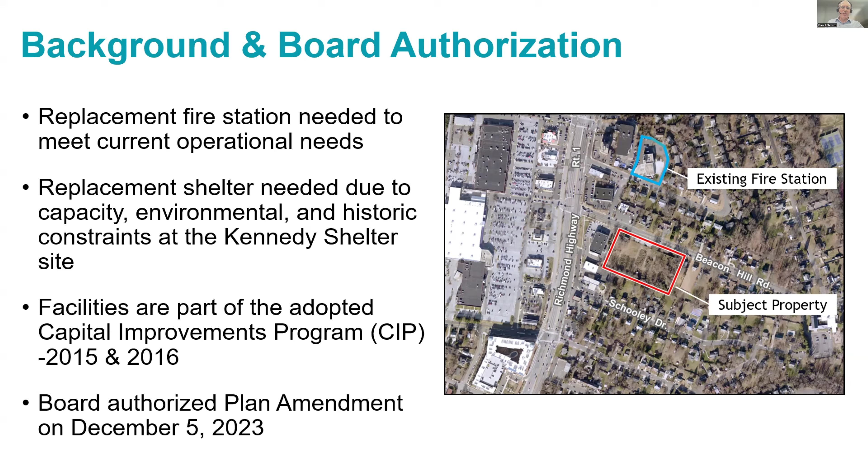Next, we'll review the location of the subject property. The site is located along the south side of Beacon Hill Road on the former site of the Hybla Valley Nursery property, highlighted in red on the map. A portion of the subject property lies within the Beacon Groveton Community Business Center, which guides redevelopment along the Richmond Highway corridor. This site is also within walking distance of a planned Richmond Highway bus rapid transit station, shown as a red star on the map, which was one of the factors considered in evaluating the location of this proposed public facility.

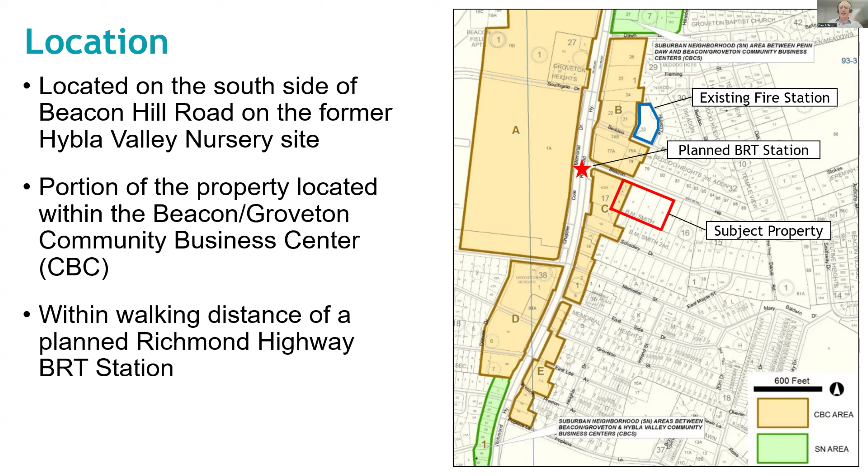Next, I'll review the current comprehensive plan recommendations for the subject property. The subject property is located in Area 4 of the Mount Vernon Planning District, specifically the MV5 Groveton Community Planning Sector. A portion of the site is located within the Beacon Groveton Community Business Center, or CBC, and within the CBC, the adopted plan recommends non-residential uses with building heights up to 50 feet. The portion of the property outside of the CBC is planned for residential use at 2 to 3 dwelling units per acre. So the subject property spans 2 planning designations.

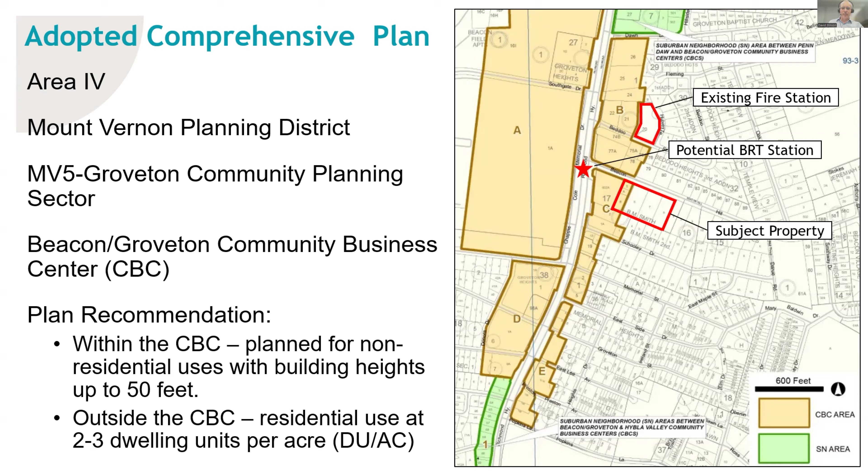This slide shows the existing conditions on site. The subject property is approximately 3.5 acres, and as previously stated, it was formerly used as the Hybla Valley Nursery. The site is currently vacant and contains a former nursery office building, which was originally constructed as a residence and later converted to commercial use. There's no active use on the property today.

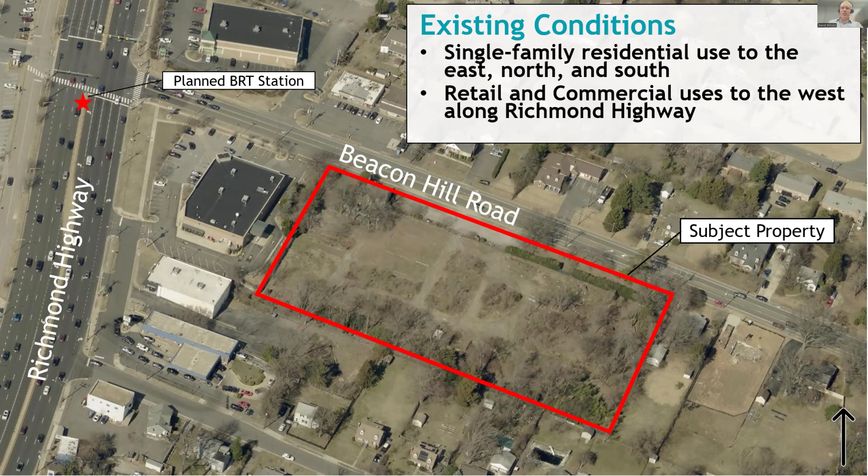This slide shows the surrounding land uses. To the east, north, and south are established single-family residential neighborhoods. To the west, along Richmond Highway, the area transitions to retail and commercial uses. So the site sits at the edge of the Beacon Groveton Community Business Center and functions as a transition between the Richmond Highway corridor and the adjacent residential neighborhoods.

This plan amendment would establish an option for a public facility use on the site at an intensity of up to 0.6 FAR. The option would allow for the co-location of an emergency and supportive housing facility and a replacement facility for the Penn Daw fire station.

The proposed emergency and supportive housing facility would include a 3-story, 55,000 square foot building. As stated previously, this building would include 50 emergency shelter beds, 20 individual supportive housing units, and 10 family supportive housing units. The replacement facility for the Penn Daw fire station would include a 2-story, approximately 24,000 square foot facility, designed to meet modern operational needs of the fire and rescue department.

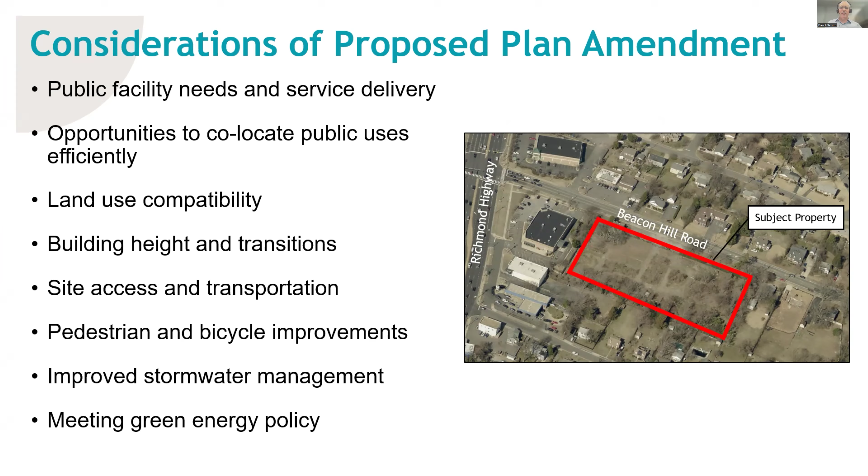The next several slides walk through the key considerations staff evaluated as part of this plan amendment. These included compatibility with surrounding neighborhoods, building heights and transitions, access and transportation, pedestrian improvements, public facility needs, and stormwater and sustainability measures. We'll start with the public facility considerations.

Both the fire station and the emergency shelter are aging facilities that no longer meet operational needs. The existing Penn Daw fire station was built in 1967 and cannot accommodate today's staffing levels or modern equipment. Similarly, the Eleanor Kennedy Shelter is undersized.

It's located in a historic structure on leased land and cannot be expanded due to environmental and historic preservation constraints. Co-locating these two facilities allows for efficient use of county-owned land, shared infrastructure, and improved access to transit and services along Richmond Highway. This approach aligns with the county's policy plan guidance, encouraging efficient use of public land and the co-location of compatible human services and public safety facilities.

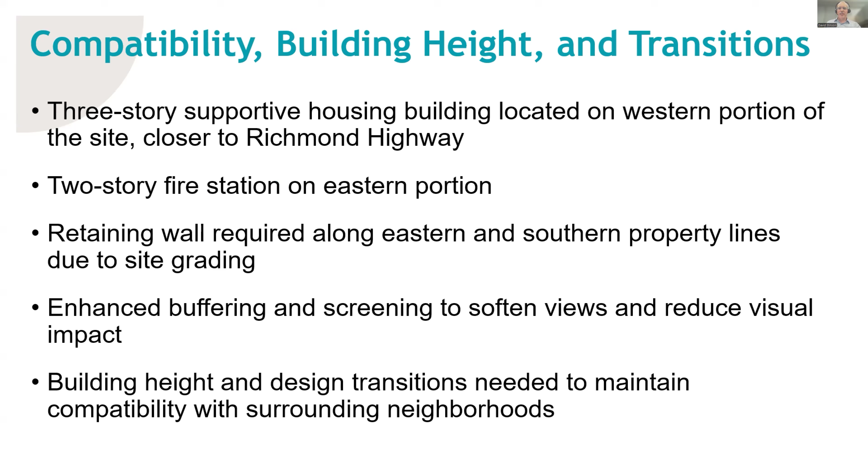In terms of compatibility, the 3-story supportive housing building is located towards the western portion of the site, closer to Richmond Highway, where higher intensity uses are already planned. The fire station, which is 2 stories, is located on the eastern portion of the property. Due to site grading, a retaining wall is required along the portions of the eastern and southern property lines. The project includes enhanced landscaping and buffering to soften views from adjacent homes. Overall, building placement and height transitions are intended to maintain compatibility with the surrounding neighborhood.

Now we will move on to transportation considerations. The proposed public facility uses are expected to generate relatively low levels of traffic compared to many other types of development. A traffic study was conducted by the Fairfax County Department of Transportation, and the proposed facility will only generate a minimal number of additional trips when compared to the use currently planned for the site by the adopted plan.

Primary access to the site would be from Beacon Hill Road, and internal circulation would be refined through the site design process. The project also includes recommended sidewalk and bicycle improvements along Beacon Hill Road, as well as improved pedestrian connections to the planned Richmond Highway BRT station. There are also opportunities to enhance pedestrian safety at the crossings along the site frontage.

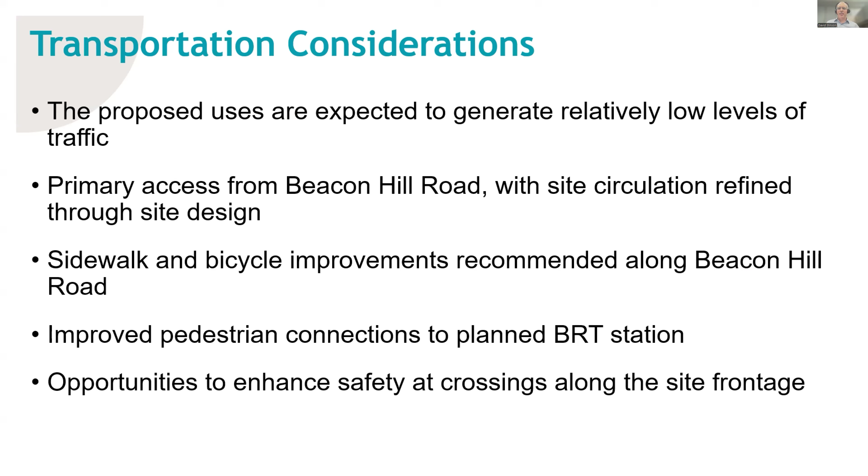From a stormwater management and sustainability standpoint, the project will be required to meet all current county stormwater management requirements. Because this is a redevelopment of an existing site, it provides an opportunity to improve drainage conditions compared to what exists today. The buildings will also incorporate energy efficient systems and EV ready infrastructure consistent with county sustainability goals. The project will also be consistent with the environmental policy plan and subject to the board's sustainable capital project policy.

To summarize, the proposed plan amendment establishes an option for a co-located public facility on the site at an intensity of a 0.6 floor area ratio. This comprehensive plan option would allow a new fire station and an emergency supportive housing facility to be considered through a rezoning process. The plan amendment also includes recommendations to support height transition and buffering where the site abuts single-family homes.

Additionally, the draft plan text recommends pedestrian and bicycle improvements along Beacon Hill Road, particularly to enhance safety and strengthen connections to the planned BRT station. Finally, I want to note that a rezoning application for the proposal was submitted by the Department of Public Works and Environmental Services. The plan amendment we reviewed provides the policy guidance, and the rezoning application would address the specific site design elements, including building placement, access, buffering, and landscaping.

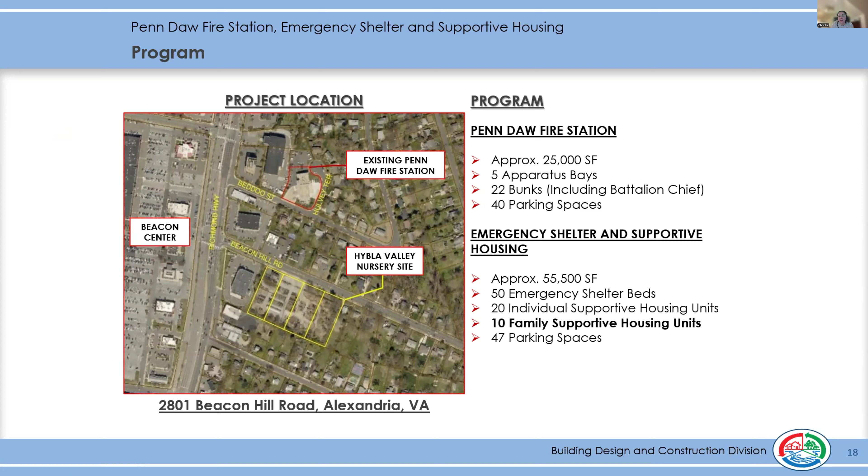Okay, so I'll take it from here. My name is Mark Minetti with BKV Group, the architect leading the design of the overall campus. With me also is Brian Fasala from MTFA, who will be speaking specifically about the emergency shelter and supportive housing. So we'll start with the site plan you see before you.

The last time we met, there hasn't been a whole lot of change from the overall design composition. The fire station continues to be located furthest along Beacon Hill Road, away from Route 1, and the emergency shelter and supportive housing portion is located closer to Route 1, adjacent to the commercial properties, the Walgreens facility. Each of these programs has very unique operational requirements, goals, and relationships.

I'm going to try and touch on those. The site will be entered to serve the emergency shelter and supportive housing components about midway through, at the curb cut along Beacon Hill Road. That will access the rear of the site where the parking is located to support staff and customer parking for the facility. Circulation for vehicles will be limited, in the sense that you will not be able to access the fire station from the supportive housing, and likewise the supportive housing from the fire station site. The topography of the site provides some challenges that we'll go through and explain in this presentation.

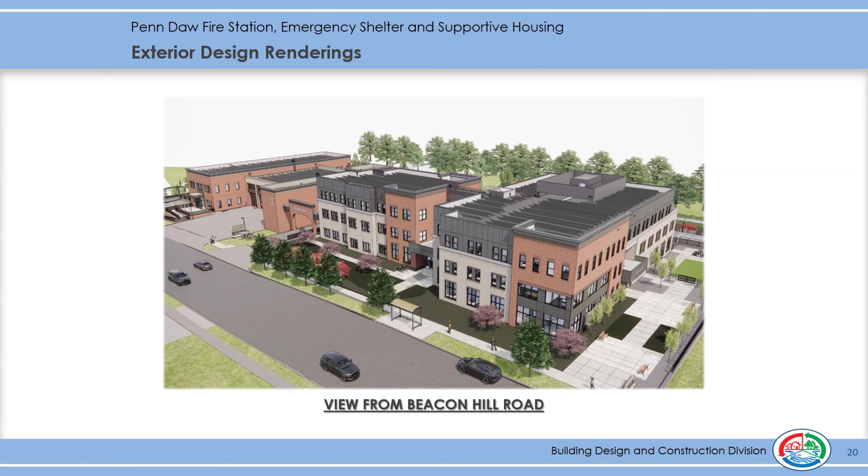This is from the opposite side, again from Beacon Hill Road, but looking up the street, focusing on the fire station. Here you can see the grade is a major challenge even along Beacon Hill Road, making sure that we're able to provide accessible entrances for each of these components.

So you're seeing the accessible ramps that lead you to the main entrance from the streetscape for the firehouse. The 5 bays for the firehouse will be accented by these folding doors.

From a wayfinding perspective, the firehouse will be very clearly identified within this composition, and the public will be able to discern where to enter the building.

Some of the architectural elements we really wanted to focus on: the palette of materials includes masonry. We have a nice red brick that we're using, and we've repeated that red tower element on several occasions because it was important that this campus read as a unified civic campus, not as two separate dissimilar buildings on the same site. So there's language we wanted to maintain and repeat throughout the overall composition.

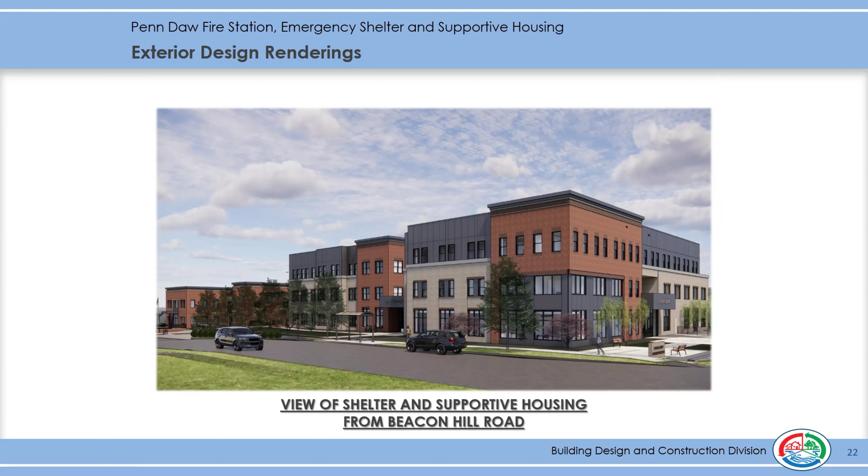Let's go to the next one.

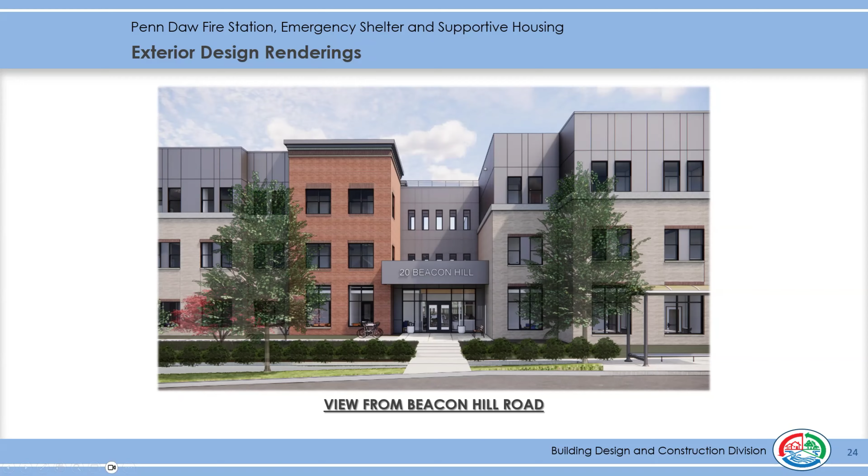And we worked really hard with planning, and our landscape team, to develop a kind of living wall concept here that was going to integrate plantings at multiple levels, and break up that wall so that it wasn't so massive, and really had a sense of biophilia within the overall design composition.

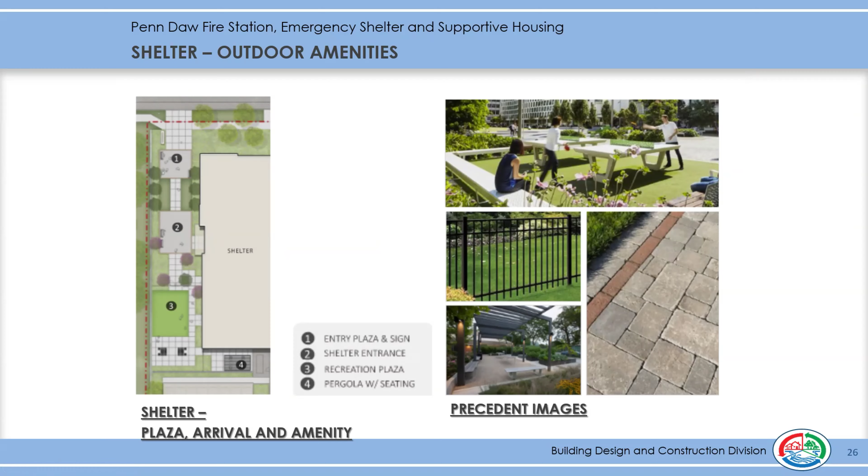Brian, these are more specific to your elements. Did you want to touch on anything specifically? I think you did a good job illustrating them and describing them.

As you mentioned, the main importance is that we really wanted to try to create two separate zones of outdoor amenity space. Outdoor spaces are very important for not only the physical but mental health of the users, but wanted to create separate zones for the shelter, which Mark had shown on the previous slide, and then this area, which is more for the family supportive housing side.

And so those would all be of very high quality materials, but also bring kind of this biophilic nature to the site, and then also carrying that inside to the building too, so that it kind of enhances the mental wellness of the users.

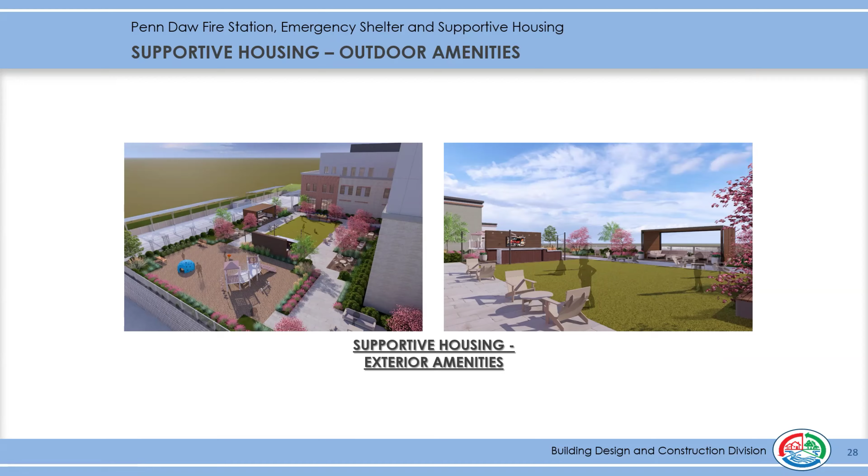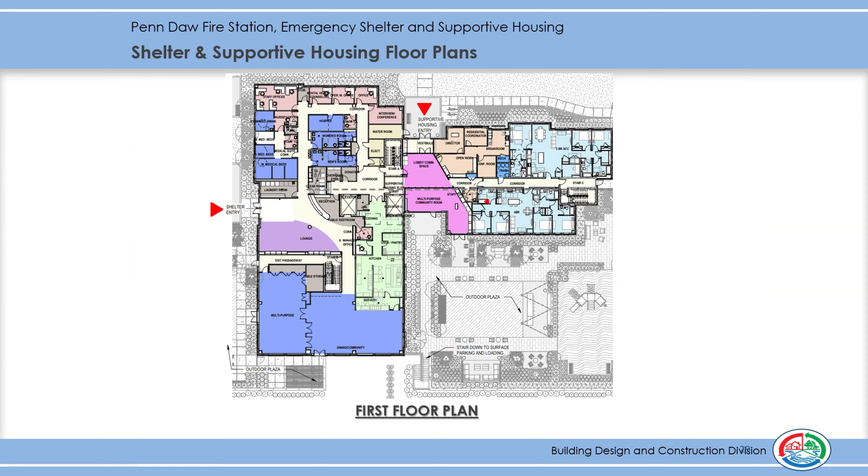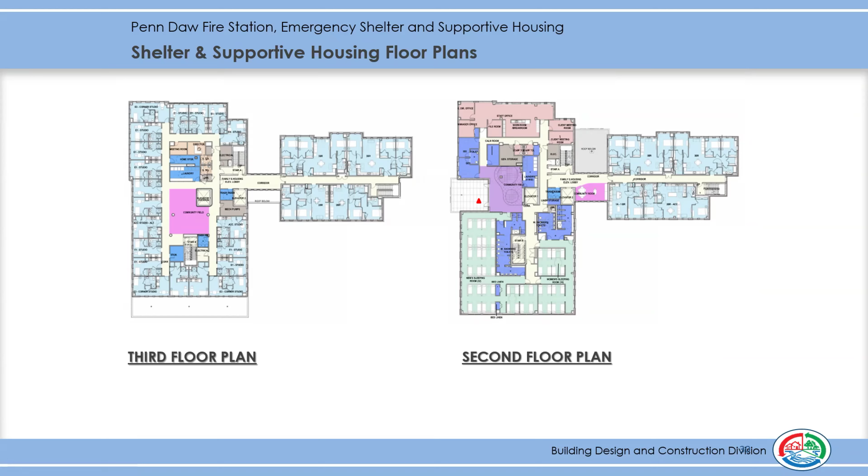With respect to fire stations, there are several best practices and priorities in terms of how we plan these facilities. Cancer prevention is a huge concern within the fire emergency services industry, so we look at segregating the source contaminant areas from what we call the clean zone. We do that through specific airlock corridors that connect the source contaminant spaces to the clean spaces, and we also segregate the systems serving those spaces, like the mechanical system, so they function independently of each other.

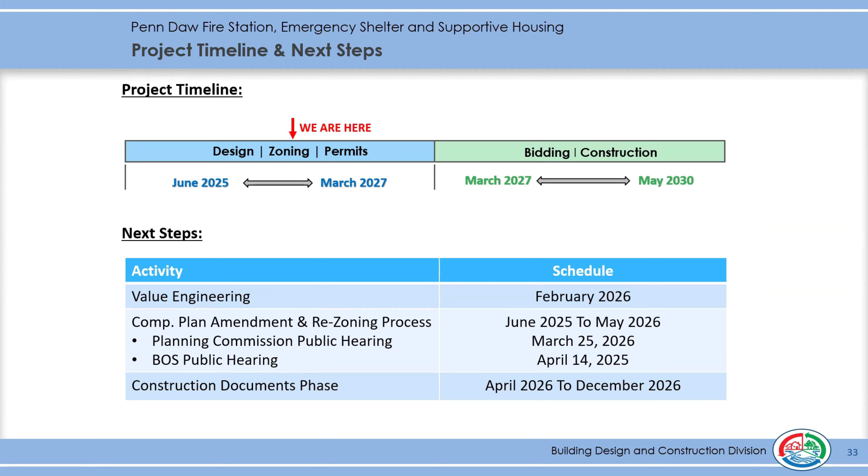Where the fire trucks exit, will there be some kind of traffic light that can be turned red when the trucks go out on a call? How will they be noticed? Lori, if that's something you can answer, or if it's already in the plans. Mark, if you have that information. Well, there is not planned to have a preemption at this condition. There's a signal down the street, at Route 1, so that should be sufficient. And of course, the location of the fire station is pulled away from that intersection because there's concern with potentially stacking at that intersection. So Lori, does fire require any kind of notice?

I know a lot of the fire stations near our office have a setup where the road is blocked out. Yeah, we haven't talked that far, but we would certainly look at maybe some striping and signage in front of the fire station. And then, as Mark mentioned, we usually have emergency vehicle preemption, so we would look to be putting a button in the station that would connect to the signal at Beacon and Route 1.

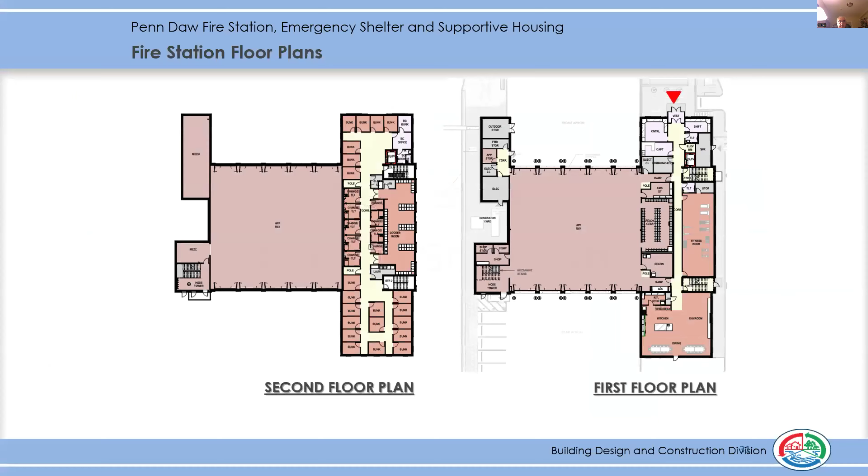The parking area in the rear of the emergency shelter doesn't have a retaining wall because it's at grade, and it would just have a typical fence system required for the buffer. My concern is, even with the retaining wall, will someone be able to walk between the emergency shelter and the Walgreens, into my backyard and my neighbors' backyards, or to the county buffered area right behind our backyards?

That is obviously something we would want to address if that's a concern. We could definitely provide additional fencing around the property line of the site. Can you go back to the plan and show where the property line actually is?

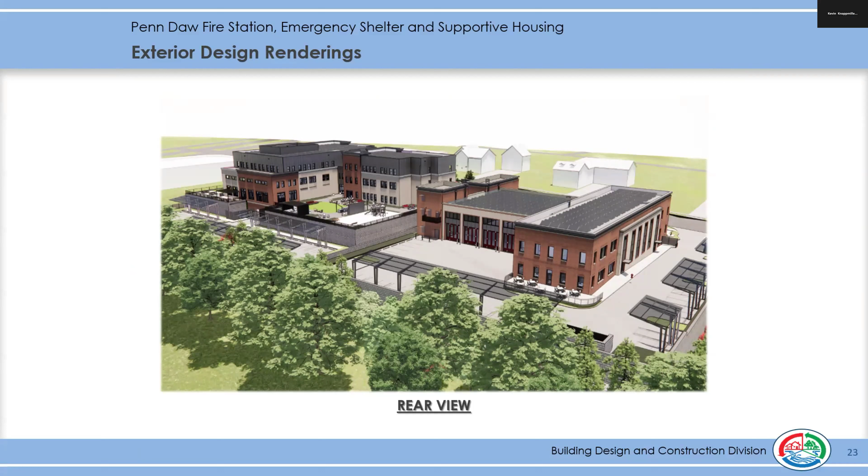The answer is, of course, people will be able to get into that area. There's no way to stop people from getting into that area. Unless you put up fences with concertina wire and guards with rifles preventing people from getting in there—well, I mean, come on, it's not going to be with rifles. That's my point, overstated. Nobody's going to do what it takes to keep people out of there. People will be able to get in there if they want to.

So your concern is, based on this illustration, someone could go behind the fire station and enter my backyard or my neighbor's backyard. My property is behind where the electric right of way is, frankly. So someone could walk around and either enter my property, shoot up drugs, have a campfire in that vegetated area between my back fence and the retaining wall, or dump litter and garbage. That's a very big concern if that area is not secured.

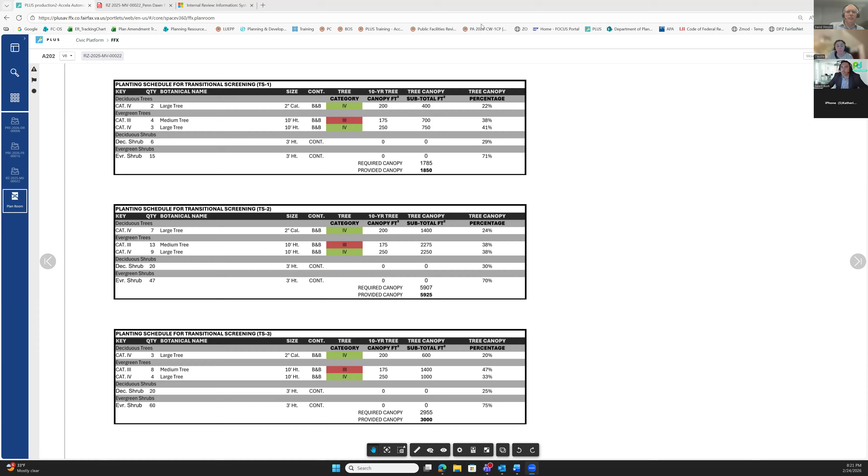Okay, do we have any other questions or comments? Nope. Ray just shot his hand back up. Yes, sir. Oh, nope, Ray took his hand back down. I just got muted after I started talking.

In the earlier plans, we had a separation between the outdoor spaces of the supportive housing and the outdoor spaces of the shelter area, and I think you at least attempted to solve that. Let me see if I'm understanding the site plan correctly. The outdoor spaces for the supportive housing are kind of one level up above the parking, correct? Because I think I saw an outdoor stair. And the area in the back of the shelter is at a lower elevation, so the only way you could get from the outdoor spaces of the shelter around the back of the building would be to climb that stair to get up to another level where the outdoor spaces of the supportive housing is, correct?

Well, the outdoor spaces for both the shelter and the supportive housing are on the same level. However, they are not connected. Where you see that red arrow is the entry to the lower level entrance, and that area is a level below. So you cannot get from the outdoor amenity space of the shelter to the outdoor amenity space of the supportive housing.

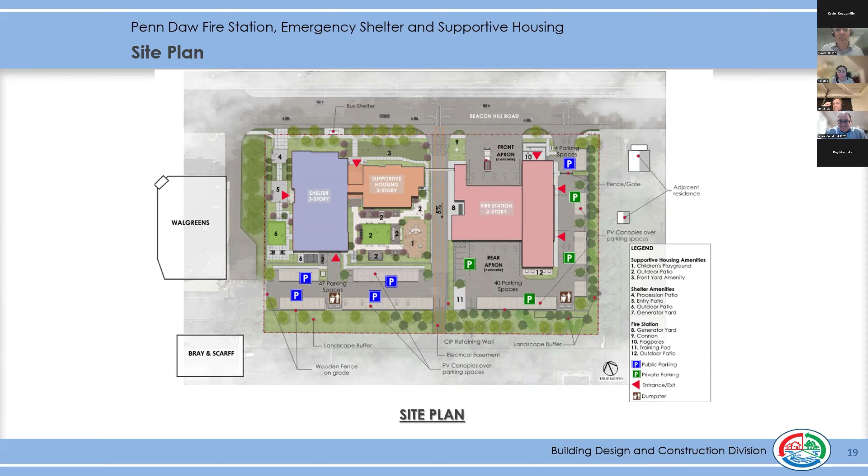We can go to the rear view, that will explain the question more, or the answer more. There you can see that gap — it's a little hard to see in there, but you can see the brown brick part continues down a full level. Yeah, I'm glad to see that separation's there. Yes.

Okay, we've got a question from Mary Payton, and then Kevin will get to you. Are the units built according to universal design? Many PSH residents are elderly. Are the units universal design?

All of the units have accessible routes and accessible entrances. They are designed to, at a minimum, meet Type B accessibility, which is required as part of fair housing. They are not currently designed for universal design, other than the 4 units that I mentioned that are fully accessible.

Okay, thank you. Kevin, you have your question? Yes, this is following up a little bit on one of the earlier questions, in terms of the impact on the neighborhood, that Tom pointed us to that earlier PDF from a couple years ago, where the county did an analysis of the surrounding properties of some of the other shelters. Having just refreshed my mind by reading that, there really is nothing quite comparable to this in terms of the number of single family homes that are so close to this facility.